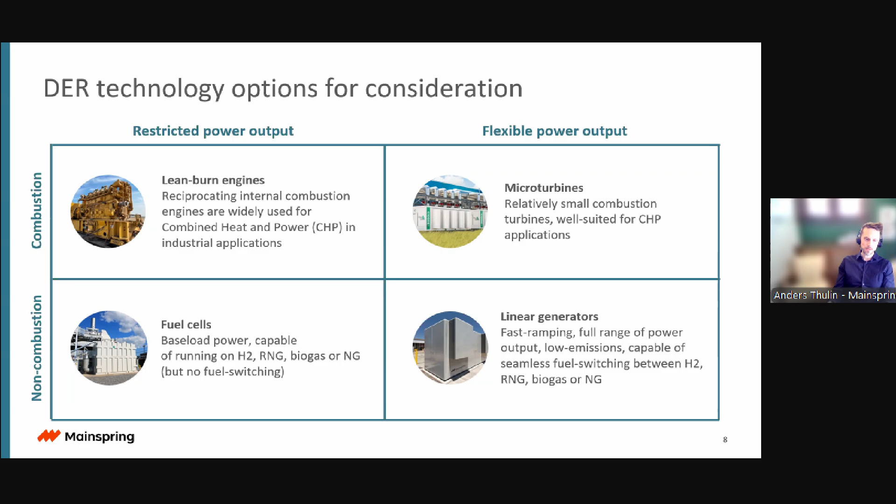So when you look at sort of the best of breed in our perspective, you want to be able to have a system that is flexible, to be dynamically following the specific load of an EV, and one that is non-combustion. And that's where linear generators come into play, that are able to ramp quickly to a full range of output with low emissions that fall within the requirements of the AQMDs, and also critically be able to switch between various fuel sources as those fuel sources become more cost competitive. If you go to the next page, please.

So specifically, a linear generator from Mainspring, again, several deployments throughout the country, heavily in California because it is a tool that's been used both for reducing cost of projects and also tying together with other grid assets or DERs. The solution is a 250 kW, 20-foot ISO container, 480 3-phase AC power out per unit. It's scalable up to 25 megawatts per acre to meet specific load requirements.

It can switch dynamically between any gaseous fuel, and not only from one to the other, but also blends of fuel. So if you envision starting with natural gas, eventually run on hydrogen to be zero CO2, then there's a method to do that by blending and increasing volumes of H2 as you go. And that also enables projects to start now, because running on hydrogen today for EV fleets may be not cost competitive. Projects we have in the ground today are both grid parallel, in other words, working together with the grid, solar assets, but also those that are completely islanded from the grid, again, as a tool to be there until the grid is able to arrive.

I think critically for this conversation, I know there are some AQMD partners on the call as well, is the emissions profile. And I'll get into the more technicalities of the how, but suffice it to say for this page that the emissions profile of Mainspring's linear generator running on natural gas, you're looking at less than 1.5 parts per million on NOx, or for those of you thinking about megawatt hours, 0.04 pounds per megawatt hour. And of course, when you think about greenhouse gases from a CO2 perspective, far less than what you see from combustion technology. And then of course, when you're running on a fuel like ammonia or hydrogen, you're looking at zero CO2.

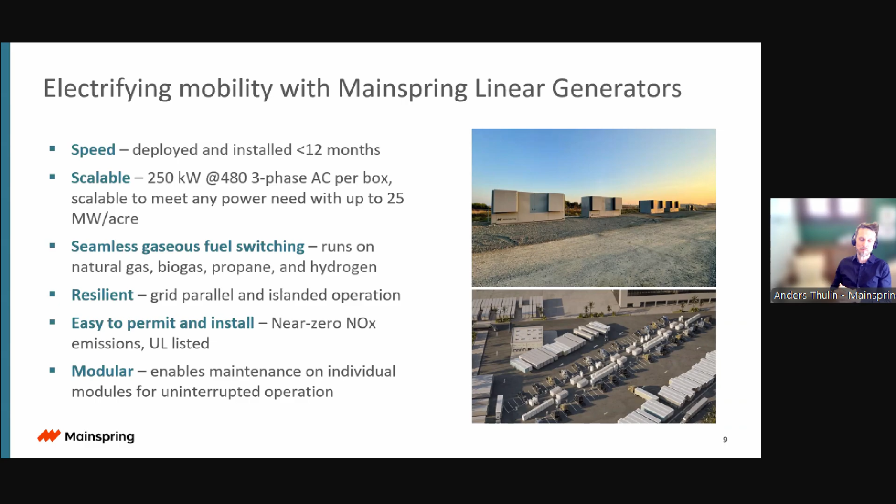A final point, which is important, I think, a lot of the technologies that exist in distributed generation today may be large tools. Think about a 5 megawatt turbine or 10 megawatt turbine. If you break something inside that machine, you could be looking at outages for the full project for months on end. Here, with a 250 kW package and that distributed architecture, you could look at impact of doing service on one unit, not having any nominal real impact on the availability of power for your fleet charging. If you go to the next page, please.

And so essentially the key thing to consider here in that center reaction zone is that you don't have sparks, you don't have a flame. So you don't have combustion in the way where in a combustion machine, because of that flame reaction, you have these hot pockets.

And those hot pockets can exceed 2,500 degrees Celsius, creating significant NOx formations. Here, everything stays below 1,500 degrees C in a homogeneous temperature reaction. So you don't have hot pockets, you can stay below 1,500 C, and you can therefore avoid those NOx emissions from forming.

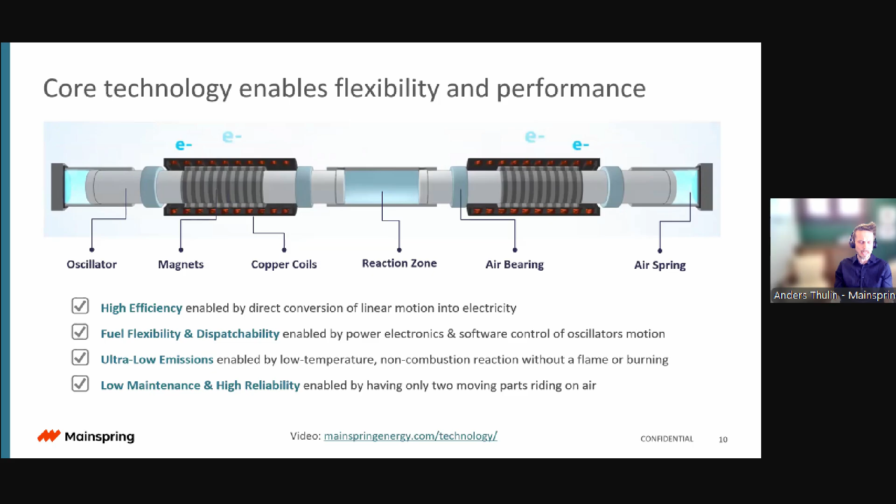I think if we turn to the next page, what this means in terms of project context is, one, this is a project with Prologis and Maersk performance team in LADWP. They needed to get this going. Maersk is a Danish company. They have specific objectives when it comes to emissions. So they may not have been as impacted by ACF regulations, more from a corporate governance perspective, to really drive EV as quickly as possible. Here they needed approximately 10 megawatts of power.

Unfortunately, it was going to be a few years from the utility until they were able to get that. So what they ended up doing was using 3 megawatts of Mainspring linear generators paired together with 6 megawatts or 18 megawatt hours of batteries. Again, we think about high ramping type of project demand. You can pair those two types of assets together that make sense in concert in that particular context. And what this enables them to do is to get power a lot quicker.

So prime power now, and when the utility eventually arrives, you can either peak hour shave, use it as a backup asset, or of course introduce some sort of alternative fuel such as hydrogen in order to further clean up and support Los Angeles objectives of deploying hydrogen. And then of course, from a speed perspective, rather than wait 3+ years for the utility to arrive, the project was able to be up and running in 12 months.

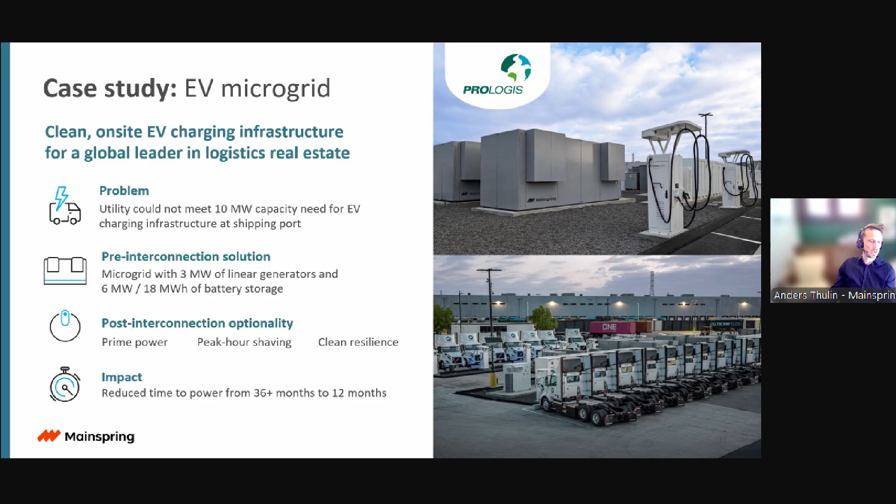Very last page, if I could please. Our view is think about deploying on-site power generation not as a means to solve one end, but a means to solve multiple ends over time. So first, you're deploying on-site power generation, in our case linear generators, to get the project going as quickly as makes sense for your strategy. Then when the utility arrives, in theory you were solving for on-site power generation because the utility was not there.

You have optionality. You can deploy us as a peak hour shaver. You can double the capacity of a project and increase the charging speed of your chargers because now you have more power, or you can use this as a backup. Remember, the classic backup technology, diesel generation, just doesn't make sense long-term from an emissions perspective. And then in phase 3, or even in phase 2, really thinking about how can we make this even better? The technology is available now. You can deploy it now with natural gas. When it makes sense to do so, you can switch to an alternative fuel.

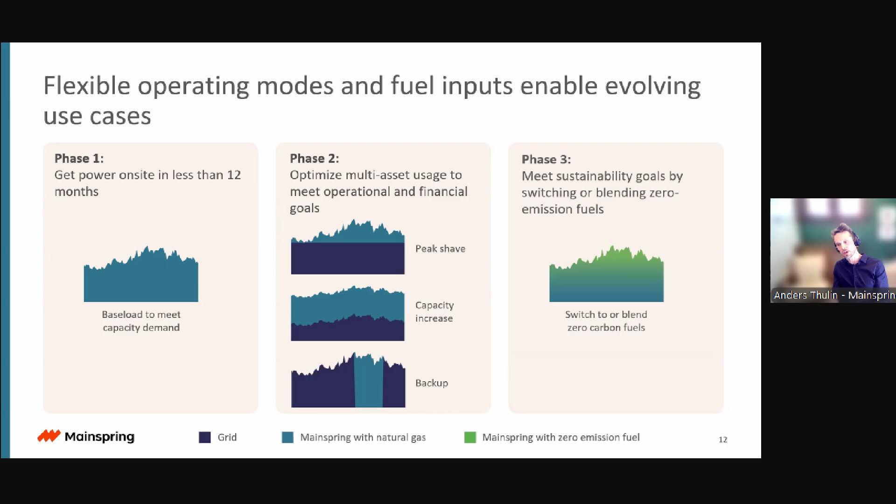So final page, key takeaway. Dispatchable DER is a critical component of all this. And we can do it without sacrificing emissions. That has to be the case. And frankly, a lot of technology has been deployed successfully. So it's not like you're having to start over and be the first of its kind with pilots. You can do projects now, today, at scale. And I think critically, think about DERs not as something that is just for one thing, but you can really use it as a tool for a lot of different purposes.

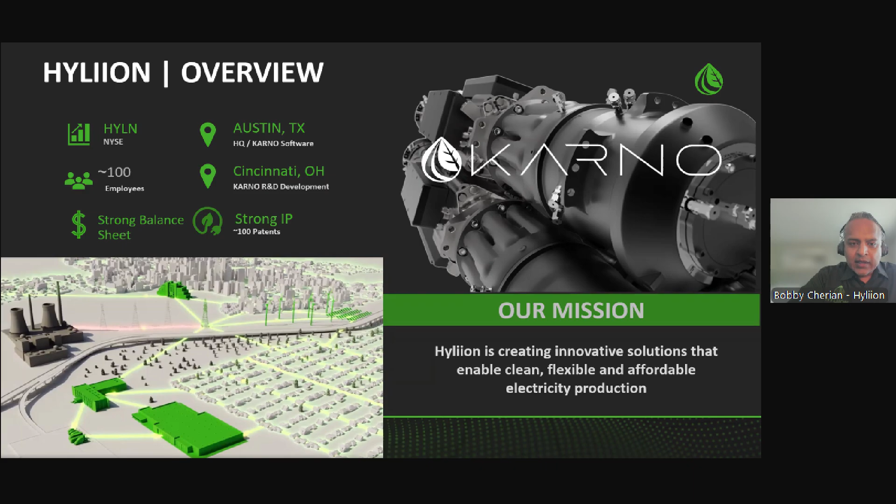Okay. I think we're still having a little bit of trouble, Leslie, with the animation. Is that correct on this one? If we click another time here. I could not get the animation to work. I'm sorry. Okay. Oh, there you go. It's working. There we go. Oh, hallelujah. Yeah, we'll take that one.

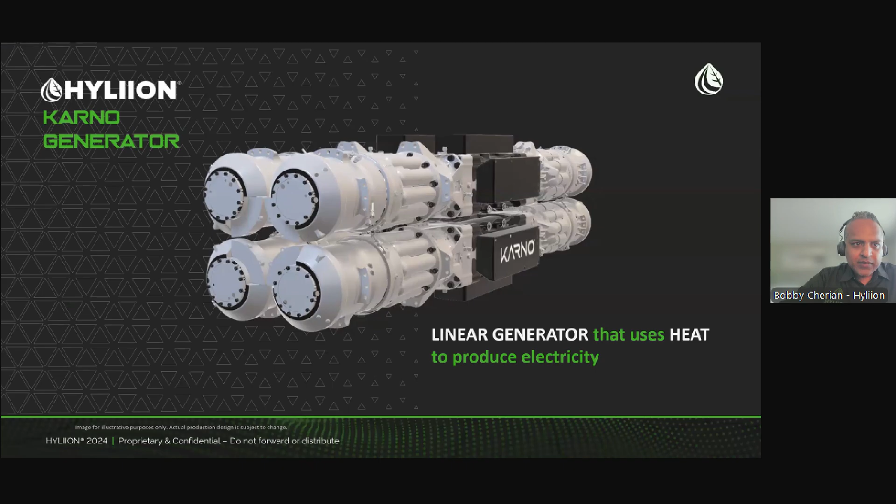And click one more time for me. And I'll just hit on some of the benefits of the generator. So we are completely fuel agnostic, and I will share with you the list of fuels that we've already tested on the next slide. When I say fuel agnostic, we use not only gaseous, but also liquid fuels as well. And as long as the fuel can produce heat, we can run it through the generator successfully. Ultra low emissions, less than 4 ppm across the broad spectrum of fuels. That will change somewhat if fuels are contaminated, for example, as we're using Permian Basin flare gas coming out of the oil fields. Our ppms can get into the 11 or so range for NOx, but it's still extremely low even when we have contaminated fuels.

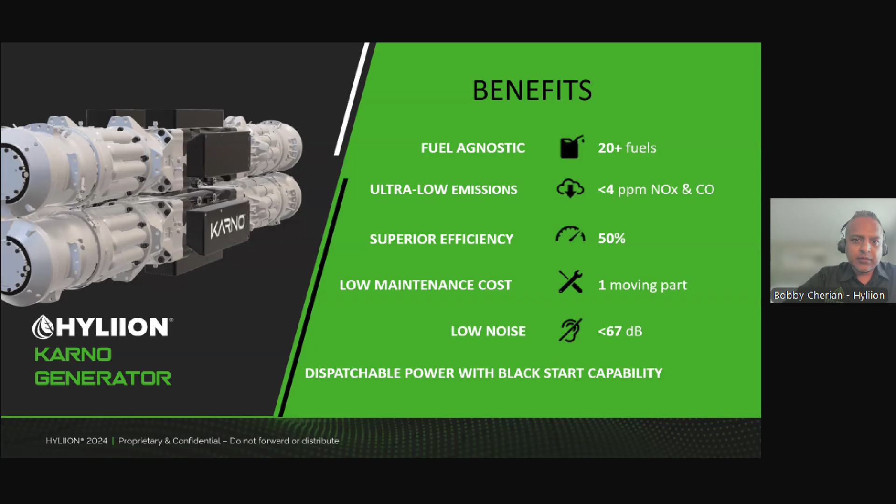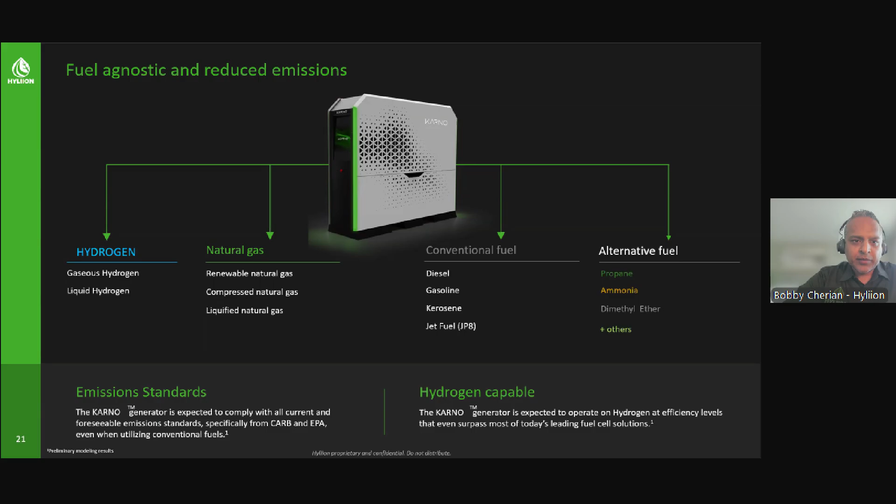Our efficiencies are at 50%, low maintenance, so we only have that single moving part in each of the shafts, so 4 in our 200 kilowatt assembly. Very quiet as well, less than 67 decibels at 7 feet. And we can go from a complete black start capability with this system as well. If we go to the next slide. Just quickly touching on this one, you'll see the different forms of fuels that we've already tested here, different forms of natural gas, different forms of hydrogen, conventional fuels, and also some alternatives and some really interesting ones like ammonia that can also be used to produce electricity with the generator. If we go to the next slide.

From an application perspective, we have a lot of options, and I'll talk a little bit more in later slides about why. But EV charging is going to be one of our first applications out of the gate this year. A couple of customers are using it in 2 different types of applications, one in heavy duty trucks, one in other applications for EVs. Data centers have a very big pull as well. We all know some of the challenges that they're facing today with power.

Waste gas is going to be an interesting place for us. We see 2 applications in this one. I already mentioned that we're doing some work in the Permian Basin using flare gas coming off of oil fields. We'll do similar with landfill gas as well. Prime power is really where the technology shines, so we have various applications around that.

And because we have some really unique characteristics around footprint and size, defense applications also are really interesting for this generator. We actually do have a contract with the Navy to put these power systems into unmanned vessels for the Navy today. If we go to the next slide.

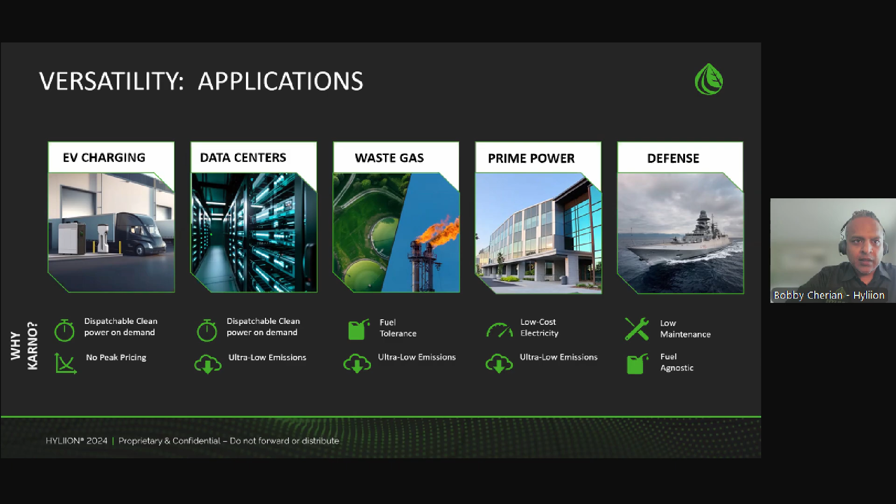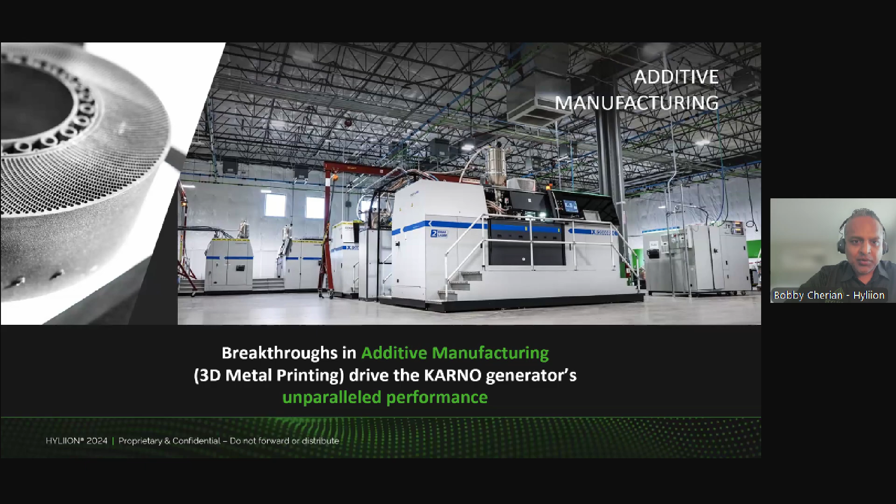So the fascinating part about the generator is that we actually make all the components internally within our facility using additive manufacturing or 3D printing. So you'll see on the left-hand side of the page, that's actually one of the parts that goes into the system. You couldn't do this with traditional manufacturing processes, and this is what allows us to get the really high levels of efficiencies and really disconnecting the reaction of the fuel from the rest of the power system as well by using really intricate heat exchangers such as this. If you ever have a chance to come out to our facility, you'll see some of these 3D printers that we have in operation. Go to the next slide, please.

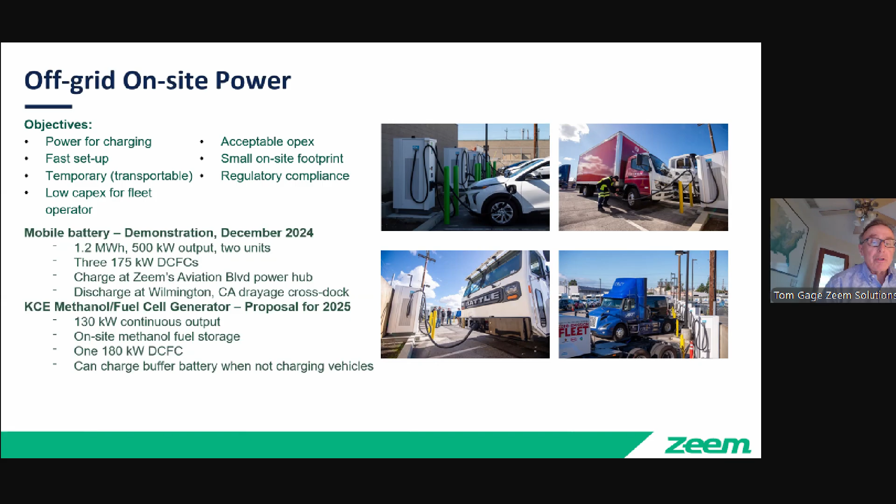So we're actively looking at two technologies to provide off-grid on-site power. One is a mobile battery. We've done a demonstration in December. And the other is the Kaizen Clean Energy methanol fuel cell generator. And I'll talk about both of those next. Next slide, please.

We like the idea of mobile batteries for one reason. Most of our sites that we're building now actually have excess power, which means we have more power than we can easily dispense in the footprint we have under our control. So that means we have excess power that we can use elsewhere if we can get it there. But as we've discussed, the grid, it's not just a generation capacity, it's a constraint on the distribution of that energy.

And with fleet vehicles, the demand is high and it's very localized. So many of the sites will require some kind of a distribution power upgrade to really service the fleets as they evolve. But with the mobile battery, what we demonstrated was we rented two 1.2 megawatt hour mobile batteries. These were built on a custom, almost 30-foot long trailer. They were within the road weight limit as towed. I think the whole vehicle was about 71,000 pounds.

And these batteries were fully self-contained with power conversion from the battery voltage to 480 volt AC, along with a fully self-contained thermal management system. We operate these batteries in pairs so that one charges while the other discharges, and then we swap positions. In this demonstration, the charging site was at LAX, and the discharging site, where we charged vehicles, was about 20 miles away in Wilmington, California. We could have done as much as 3 cycles a day for each battery, so we would have been able to deliver about 7,000 kilowatt hours per day. Next slide.

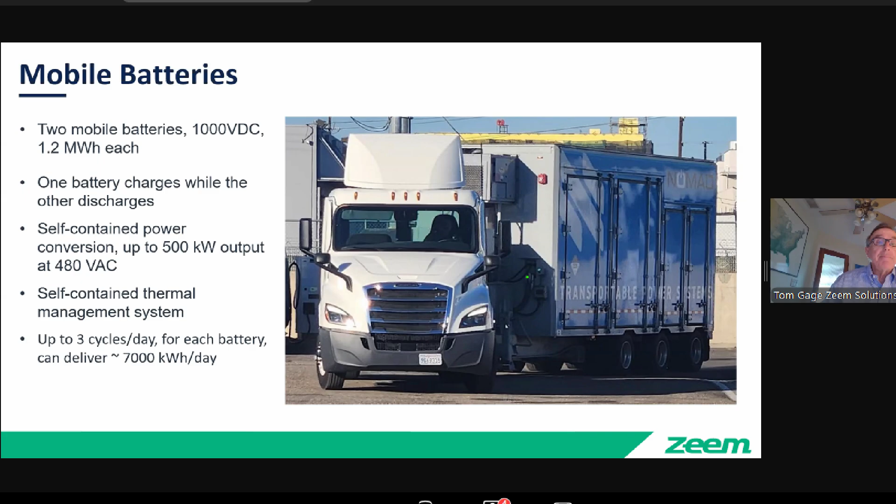One of the most impressive aspects of this demonstration was that we got it up and running in one day. At the power hub, which was our site near LAX, all we had to do was drop a 300 kilowatt skid-mounted transformer and hook it into a circuit that we had available that was powering level 2 chargers, which we almost never used. So we had a transfer switch that would allow us to take that power, run it through the transformer, and into the mobile battery. Next slide.

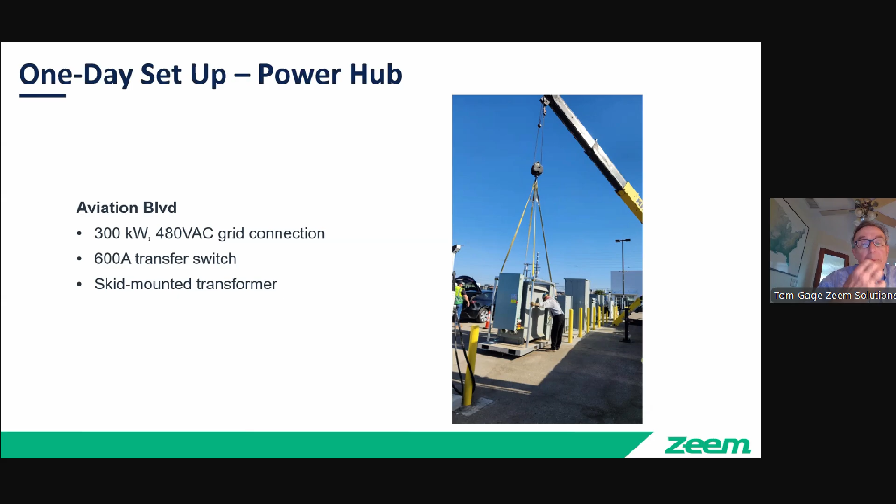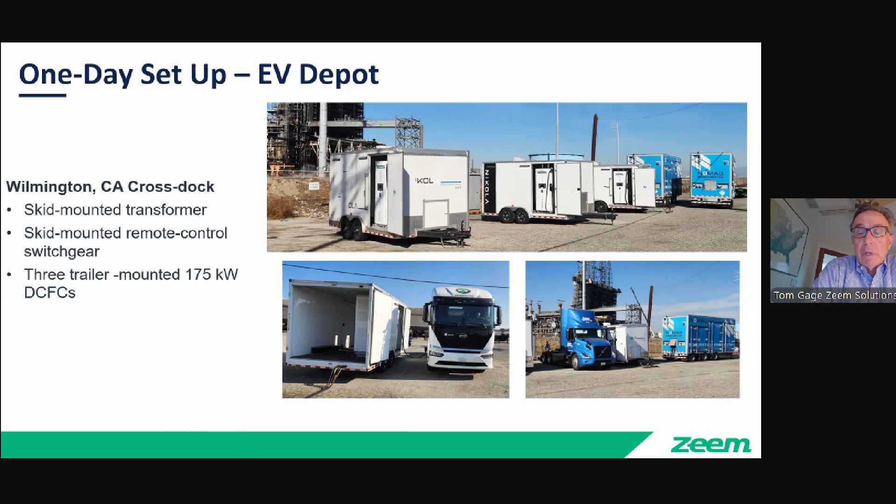At the Wilmington site, we had to drop another transformer. We also had to drop a skid-mounted remote control switchgear, and we towed in three 175 kilowatt DC fast chargers mounted on trailers. Then with the Nomad batteries hooked up, we were able to start charging Class 8 tractors there the same day. So literally it was a one-day setup from nothing, from a bare lot to charging tractors. Next slide.

The Kaizen Clean Energy Methanol Fuel Cell Generator is a technology we've been studying or working with for almost 2 years. It is basically a fuel cell generator that runs off of hydrogen that's converted from methanol. So methanol, a liquid fuel, is delivered by trucks. A proprietary reformer is used to convert the methanol into hydrogen gas. The hydrogen gas is stored in a low pressure vessel and is then used to power an off-the-shelf fuel cell. The electricity is stored in a 96 kilowatt hour battery and then is used to power 1 or 2 DC fast chargers. Next slide.

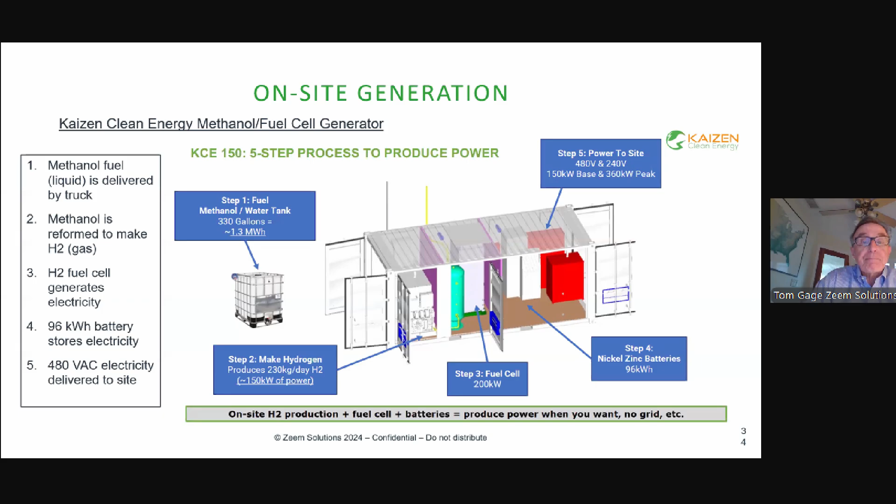This is a picture of what the Kaizen system will look like. This is a second generation version that is basically contained in 3 20-foot containers. One is the methanol fuel cell generator. One is a thermal management system that can be mounted on top of the fuel cell generator. And the third is a methanol fuel storage tank. The output is about 150 kilowatts continuous, and it can load follow or charge stationary batteries when not charging vehicles.

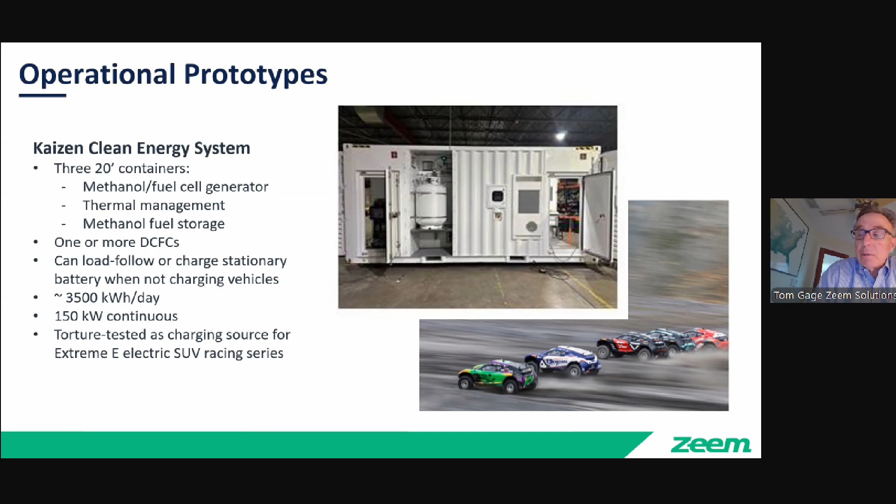The one pictured here is a prototype. There's an earlier prototype that's been in use for about 2 years. It's been torture tested as the source of electricity to power a fleet of electric racing SUVs competing under the Extreme E contest. So it's fairly well tested in very arduous conditions. These races took place all over the world in isolated areas. So it can pass that test. We're working with AQMD to fund a demonstration of this unit so that we can better understand the logistics of handling the methanol fuel, the efficiency, and the operating cost in actual use. Next slide.

I remember a project when I was in college where we converted a car to methanol, and it had many purported advantages. We didn't achieve those. In fact, we had a car that generated a lot of, I forget what it was, but it came out of the exhaust pipe. It stung your eyes pretty badly. Formaldehyde, that's what it was.

But actually, methanol does have some significant fuel advantages. One is that it eliminates the need to transport high pressure hydrogen. It's much easier that way, and so we generate the hydrogen on site. According to Kaizen, methanol is the lowest cost H2 carrier. And I should mention that at the site, the methanol is mixed with about 20% deionized water, which adds hydrogen to the mixture and optimizes the operation.

Methanol is a safe fuel, flammability and combustibility like diesel, water soluble, easy to extinguish a methanol fire. It's a liquid, not a gas. And methanol is readily available, globally produced, widely distributed, and Los Angeles is a green methanol corridor. Methanol fuel generates 0 NOx and SOx and particulates, and its carbon intensity is dependent on how methanol is produced. Next slide.

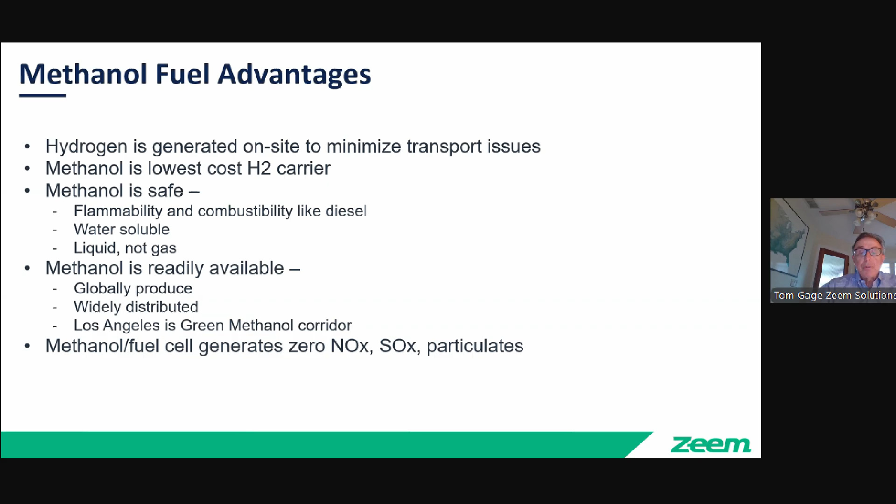In summary, Zeem believes off-grid power is necessary to accelerate fleet electrification, and we're looking for solutions that are scalable, convenient, versatile, transportable, and easy to implement and finance. And so anything that can meet all those criteria we like. Charging economics are difficult. We go by the understanding that diesel fuel refueling is about 100 times faster than battery charging. And so diesel infrastructure is not a good model for EV charging. It requires a different approach from both the fleet operators and the fueling or energy providers.

Utility and PUC participation and adaptation are necessary over the long term to meet the needs of electric fleet charging, and we think off-grid power may help spur the necessary changes.

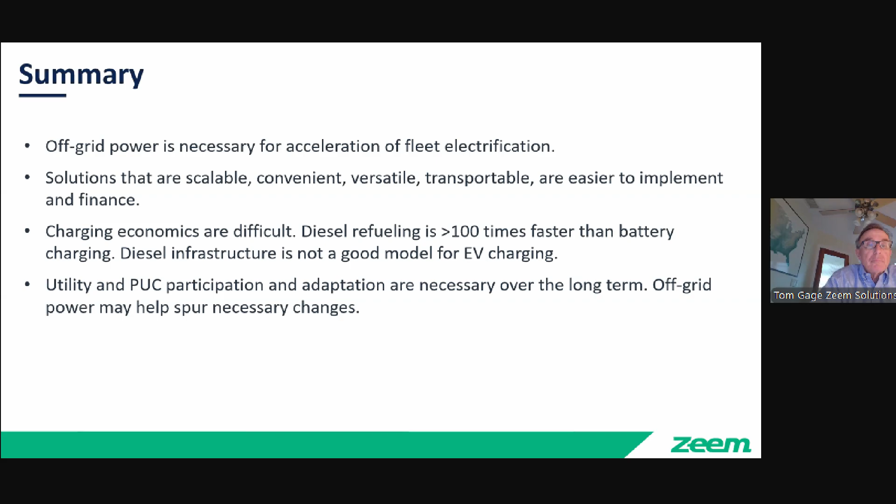All right, thank you so much, Tom. Our next presenter is Hye Lo. Hye is an air quality specialist at South Coast AQMD who will be talking today about the Air District's Rule 1110.3 on emissions from linear generators. Thank you, Leslie. Yes, once again, my name is Hye, air quality specialist at South Coast AQMD, here to go over Rule 1110.3. Next slide, please.

So just a quick background on how we got here with the regulation. In 2019, during the amendment to Rule 1110.2, which is emissions from gaseous and liquid fuel engines, we were informed of linear generators. You guys heard that from Anders during that introduction there. And during that time, the emissions were incorporated into 1110.2. However, you guys again have heard the unique operating characteristics of the technology. And so we decided it was a good idea to develop a rule specifically for the technology, for the considerations of it.

And as a result, going through the rigorous and robust public rule development process, Rule 1110.3, emissions from linear generators, was adopted by our South Coast Board in November of 2023. And the regulation has specific limits for linear generators, as well as other provisions, including source testing, monitoring, reporting, and record keeping. Next slide, please.

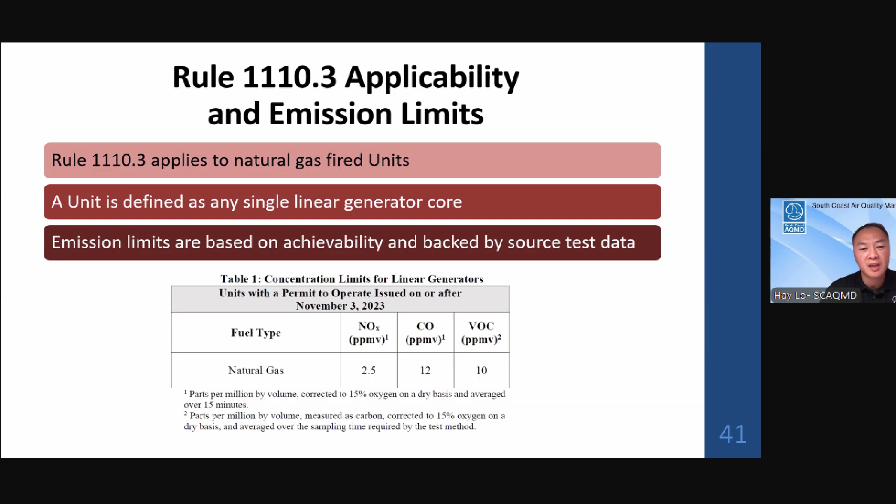Now, diving into the emissions limits themselves, we looked at source testing data, source testing results. And based on that, you see here in table 1, the concentration limits for linear generators, basically 2.5 ppm for NOx, 12 ppm CO, and 10 ppm for VOC. Next slide, please. So on that note of NOx emissions, we looked at comparison to other rules such as South Coast Rule 1135 for NOx, and the emissions limits mirror those in that regulation. The NOx emissions also meet CARB's distributed generation certification program limits, and so just a comparison as far as electricity generation technologies goes. Next slide, please.

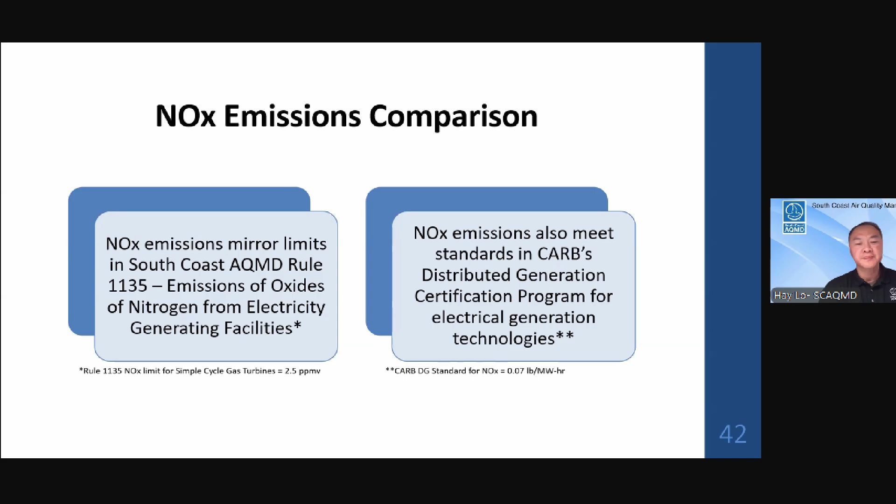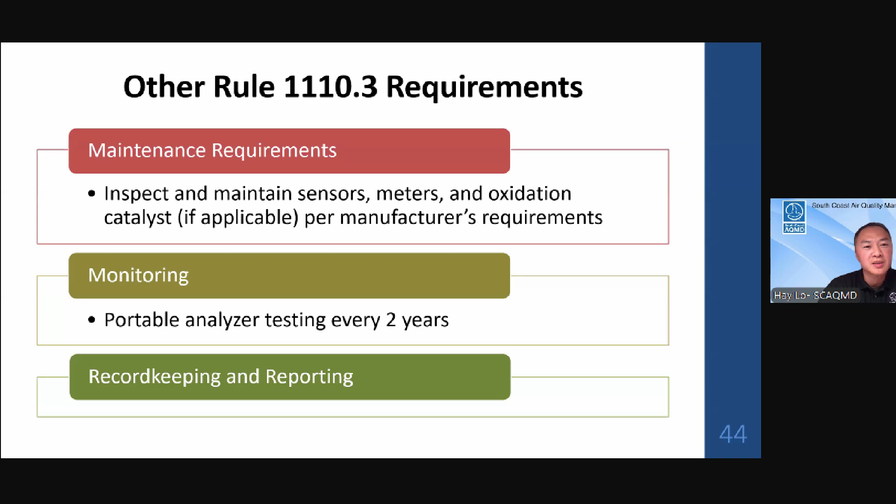Next slide, please. In addition to the source test, we have other requirements, as you guys can imagine, maintenance requirements, inspections based on the manufacturer's recommendations. And monitoring is also important, monitoring to verify emissions compliance. That's going to be required to be conducted every 2 years. And all of the associated record keeping and reporting along with that to verify compliance. Next slide, please. So moving right on to the current applications and what we're seeing within our South Coast Air Basin. Again, peak power, prime power and peak shaving, just as you've heard from the presenters previously. Microgrids, they're used for situations where grid power isn't readily available, and so they're being put in as kind of a bridge solution to provide the power for EV charging trucks.

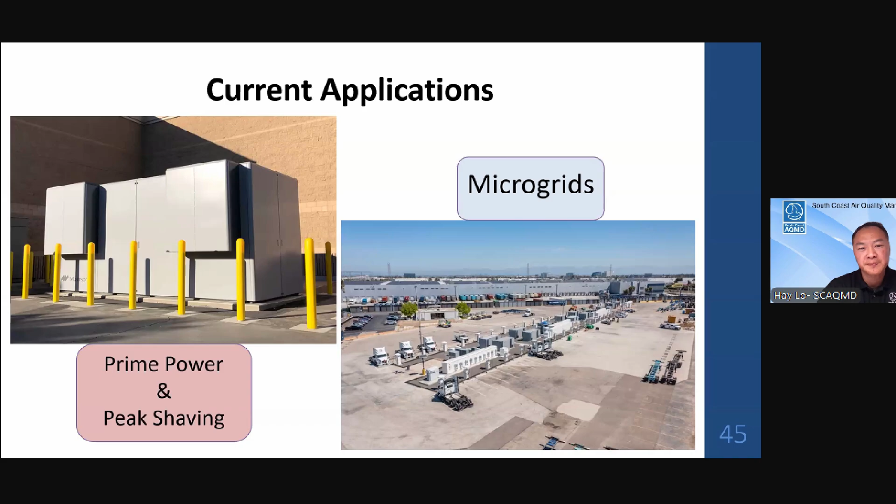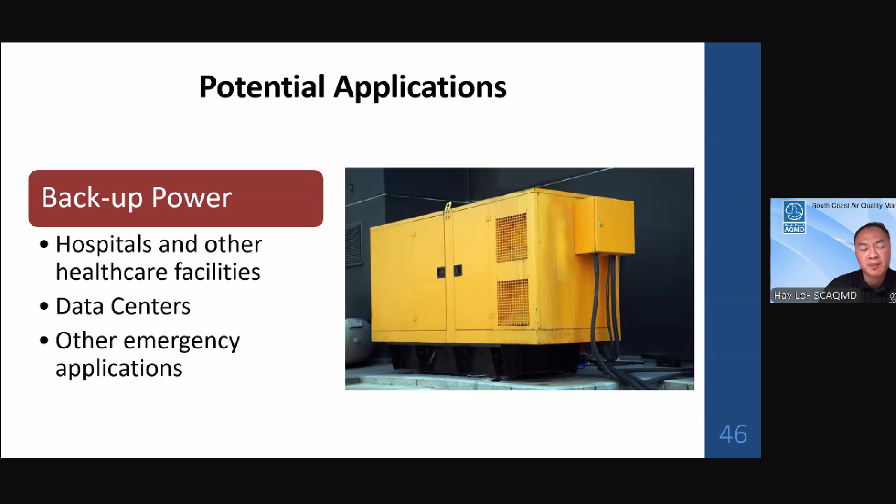Next slide, please. Now, what we envision moving forward as far as potential applications, you've also heard that this technology is a great transplant for backup power, such as applications in hospitals and other healthcare facilities, as well as data centers, and potentially other emergency applications. Next slide, please. And other future plans and considerations, again, we'd like to explore the fuel agnostic capabilities. There's a lot of potential there for a reduction in emissions, such as hydrogen fuel technology. It was also mentioned that ammonia could be used as well as other renewable fuels. So as an agency, we're definitely interested in learning more about that. Given the infancy of the technology, we're really curious about the durability and robustness of this technology. So we're going to continue to keep an eye on the performance of this technology over a period of time and see what the life expectancy is.

Right now, Rule 1110.3 only covers the 3 criteria pollutants, but we're also interested in learning more of the other potential emissions that might be coming from this technology, more specifically looking at particulate matter and toxic air contaminants. And finally, as we start to learn more about the fuel characteristics and durability, we are definitely considering any potential update to the rule that might have different emissions limits for the different fuels, because remember, Rule 1110.3 is specific to natural gas-fired units only. And so, that's definitely a consideration. In addition, we have a certification program that we are trying to develop for this technology.

Working with stakeholders, we felt like there's potential there for developing a certification that would streamline the process and that would help expedite and get this technology out there where it's most needed. And next slide, please.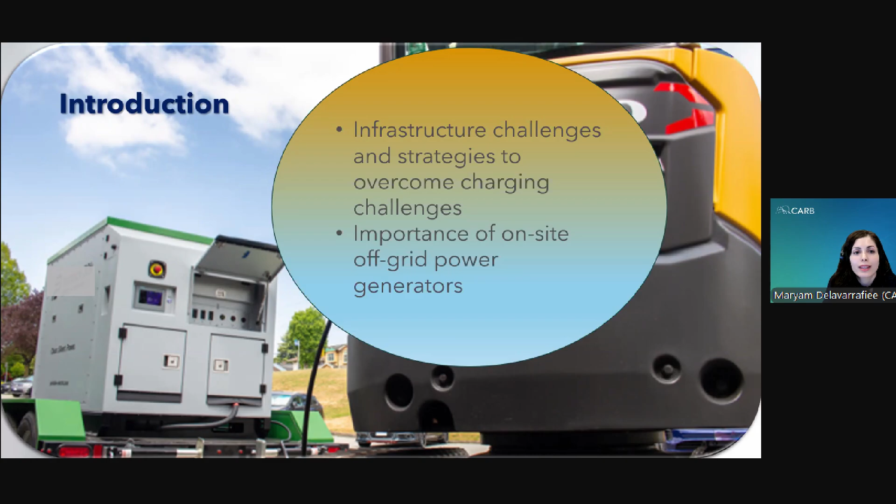So to address this challenge, as we heard in other presentations today, fleets are seeking interim solutions like integrating on-site generators to quickly provide power for charging electric fleets. Next slide, please. So the scope of my presentation today focuses on on-site off-grid power generation using non-zero emission generators. And the objective here is to perform a SWOT analysis. A SWOT analysis is conducted here to provide an overview of implementing on-site off-grid power generation solutions, helping fleets considering these solutions make informed decisions.